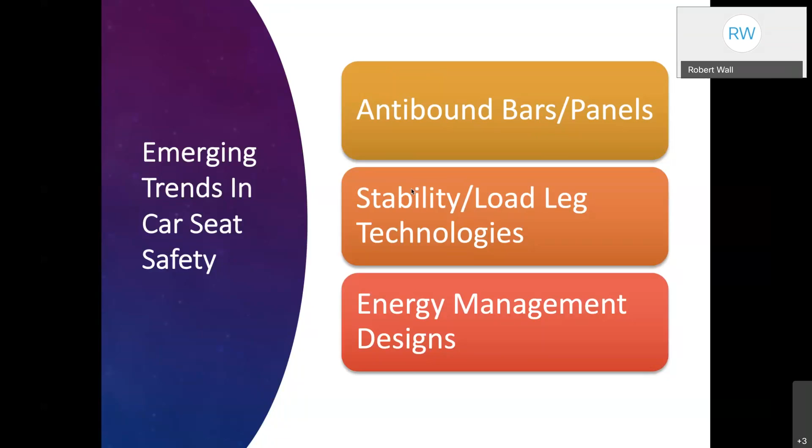Now, one thing that I will say, our 213 standard does not regulate stability or load legs or anti-rebound bars. It does not. It also doesn't regulate any other type of energy management. It does not say you have to have X, Y, and Z to make the data say this. They just give us a performance standard. How you meet that standard could be a number of things.

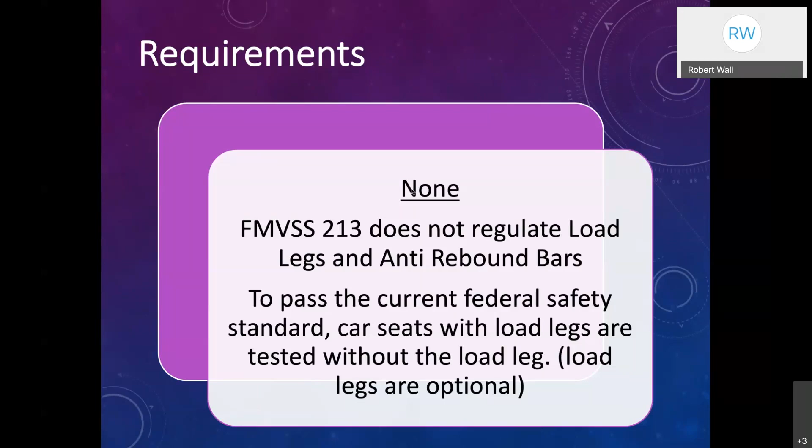Now, the biggest problem with introducing some of these things like load legs and anti-rebound bars, there is no testing procedure for those. There is no standard for those. There isn't even a floor in the 213 bench currently. So testing a stability leg or a load leg becomes problematic and also very expensive. So that's another reason why it's taken a lot of time to kind of migrate to the US. It's an extra cost that people were just not willing to put into it.

So think about it, what are the five things a child seat does? Go back to our child seat class, go back to the standardized curriculum. Keeps the child in the car. It contacts the strongest parts. It spreads the forces over a wide area of the body. Sounds like crash energy management, right?

A child seat helps the body slow down or ride down the crash forces, and it protects the vital organs: the head, brain, and spinal cord. If you saw Julie's presentation this morning, she did a great job talking about how we need to protect that head, neck, and spinal cord, and even head injuries can lead to spinal cord or neck injuries just from the impacts.

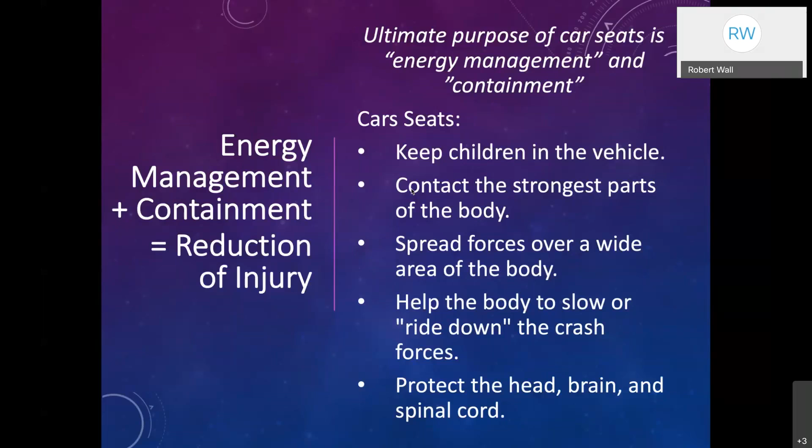So again, what does a child seat do? The first thing it does is keep them in the car. Then the rest of this is all basic energy management. But how do we manage it even better through design?

There are a lot more seats out there now that have a lot more features on them. All of these are proven trends now being introduced into the US - load legs, European belt routing where the shoulder belt goes around the back, and anti-rebound bars. They're all designed to reduce the transfer of energy to the child, resulting in less injury. In Europe, legs are standard in many places. Rebound bars are standard in Australia, Canada, and other places.

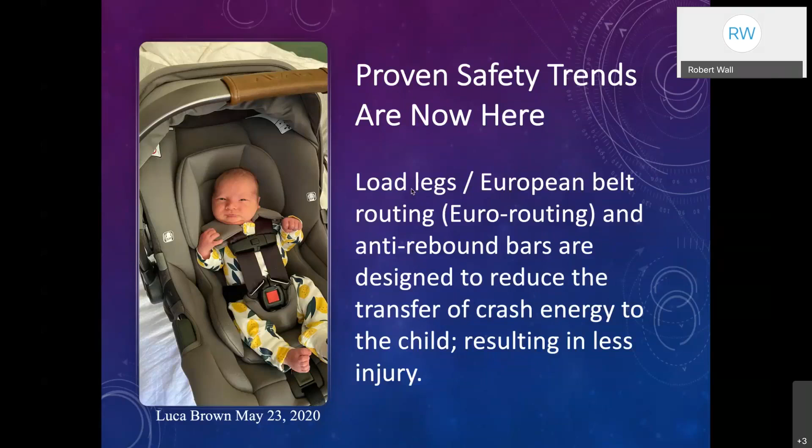Now, do they do what they're supposed to do, and what is it they're supposed to do? Let's talk about legs first. The stability leg is the big thing you're going to see on the shelves the next year or two. I almost think every child seat manufacturer, except for one or two, either has a seat with a leg or is working on one, and the reason is because people are demanding a little bit extra safety for their child.

Also, because of that demand and the design features other manufacturers have done, it's not as expensive anymore. At one point, when ISOFIX or the latch system was introduced into the United States, everybody said, well, let's just do the same one Europe has. Well, it was heavy and expensive, and it was going to cause probably less child seat use. So we had to come up with a hybrid, which we now call latch. But that hybrid didn't include a leg, which the European version does.

So do we use a leg? The question is, it's up to you, it's up to the manufacturer. Do they want to take that extra step to design it in - a lot more money, a lot more testing - and then the parent has to put up that extra money?

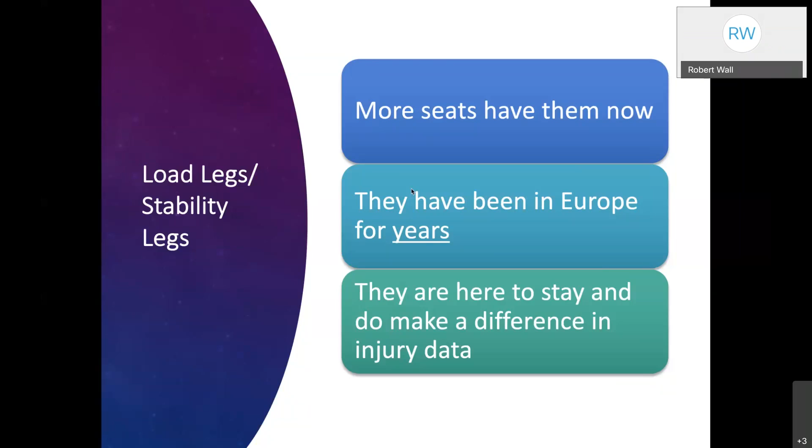But I will say this: Evenflo now has a child seat with a stability leg for under $300 - actually under $200. So it's becoming affordable. These energy management tools are doing just that - they're becoming affordable, and they make a huge, huge difference in injury data.

What the leg does is support the part of the seat or base that extends from the base to the floor, and it can provide additional stability. It absorbs the energy and stops that rotation. Now, unfortunately, as one of the very first instructors, we didn't do a great job of talking about rotation - we talked about rotation as ride down, and people really thought the rotation part was the ride down, and that is not true.

The rotation is just extra motion. There is no ride down until that rotation stops, and then the energy is transferred or ridden down through the seat - down through the seat, across the baby's back, into the plastic shell, and through the floor of the vehicle, through the leg. That's when the ride down begins.

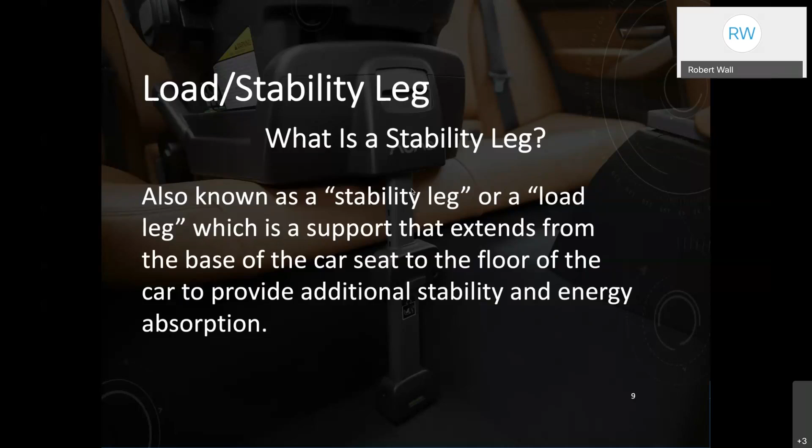So all that other stuff is just extra motion. The goal is, how do I start ride down quicker? I reduce the rotation forward, and to do that you would use a leg. The leg starts that ride down process much sooner - it limits the initial movement toward the point of impact, which reduces not only rotation and injury to the child, but also reduces rebound.

We haven't even talked about rebound things yet. What it does - because we've taken, and somebody told me this one was great - if you take the wind out of its sails going this direction, there's not as much energy going the other direction.

Julie this morning talked about a study done at Ohio State, and they didn't find a lot of data showing a significant pattern of injuries in rear end or rebound crashes because of rebound.

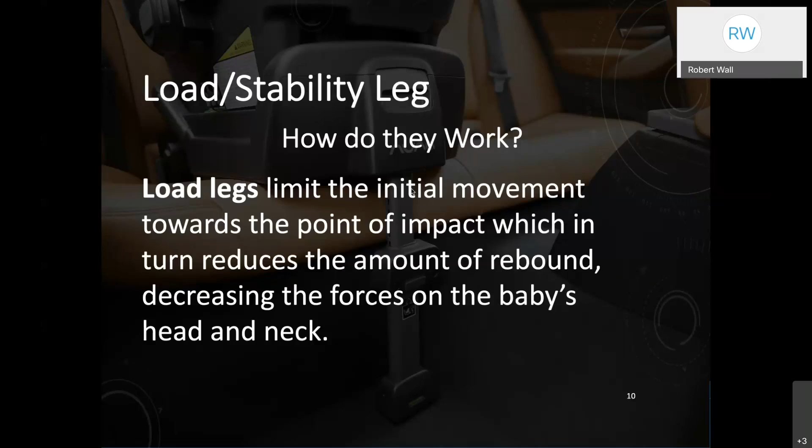Child seats are doing a good job because they're either reducing that initial energy, taking some of the energy out, or have a sturdy enough base that's up against the vehicle seat enough, or installed well enough that it doesn't rotate all the way back. So there's no striking or injuring of the head, neck or spinal cord. It decreases those forces on the baby's head.

When you think about what a leg does, it reduces the rotation, sometimes by 90% or more. If I can start or stop that rotation quicker and start the ride down quicker, that's potential for less injury to the child.

When we look at the data in a crash test, we look at HIC values, head injury criteria. In one of our tests for 213, we saw almost a 40% reduction in that number using a leg versus not using a leg. If I can reduce injury values to the child's vulnerable parts, the head and neck, by 40%, that's what I really have to think about.

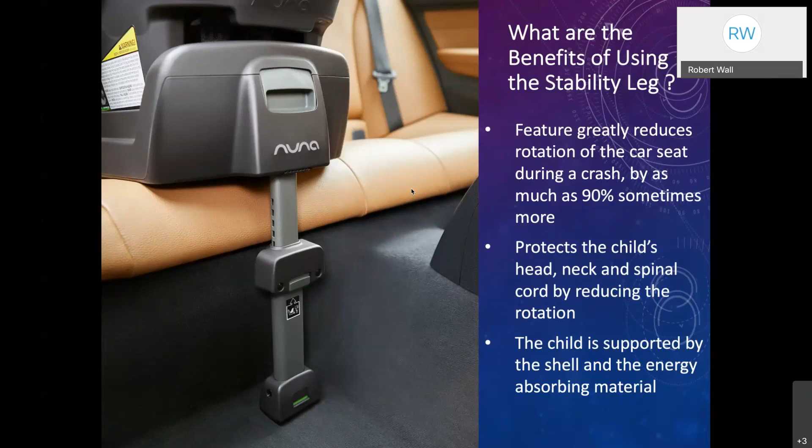Here's our standard base. It's just a leg that goes down and touches the floor, and all it has to do is stop that rotation. But it also reduces the backward rotation because we've taken the energy and distributed it.

Let's look at some crash tests. This is a standard seat, typical car seat rotation without a load leg. It starts at 40.45 degrees vertical - the yellow lines are vertical, and the second angled yellow line is the starting angle and the apex angle, the furthest point into the crash. So we start at 40.45, and at full rotation it's just a little over 63 degrees from vertical, about 23 degrees of frontal rotation.

Guys, that is a 213 pass. It's not a less-is-better test, it's pass/fail. If it goes over 70 degrees, it fails. If it's under 70 degrees, it's a pass. So this passes the test.

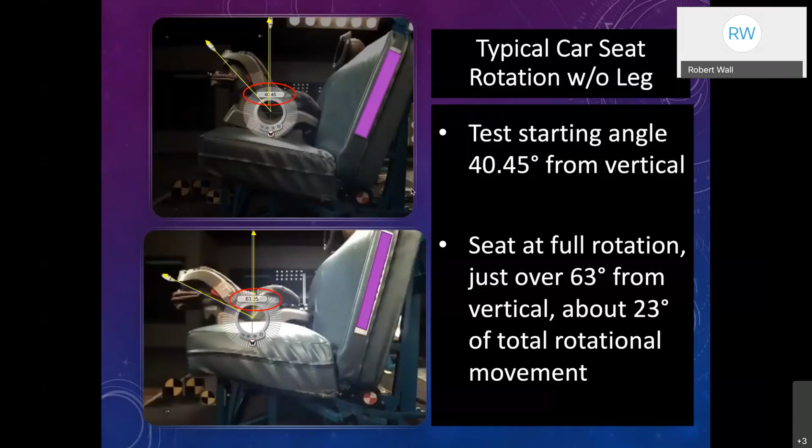Here's our original PIPA, rear facing, without a leg. Somebody asked in the last workshop, is the leg optional? Yes, it's not required in the US, it's not required to be tested. It's not tested, but we have to test it to make sure we're doing our due diligence to make sure it passes in all modes.

But we do test it with and without. This is without a leg. Our starting angle is usually about 36.12 degrees - we do it very specific. And at full rotation, we get to 54.6 degrees, so it had about 18 degrees of rotation.

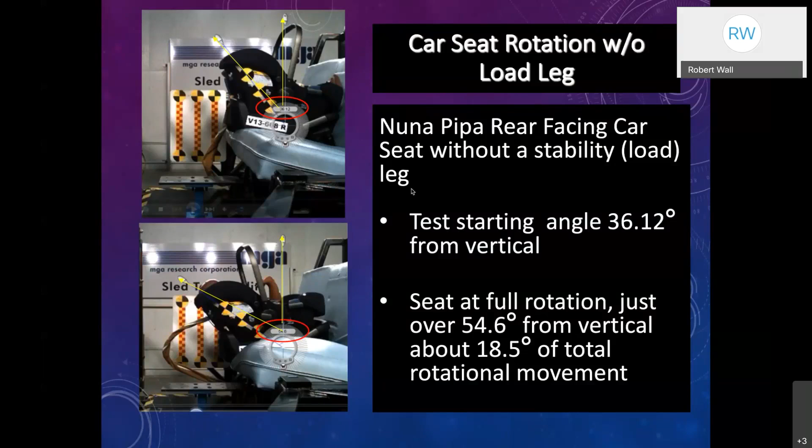You can see in the two pictures, the targets in the back, the lines and targets show how it's reclined, covering up the first and second target. If it came down another 20 degrees or so, the top of that seat would be toward that third target almost, and it would be a fail. This is a passing test.

So what does it look like with the leg? We have a test with the leg - this is a 213 test that we did, and I had to pick this one because it was a great one. It started at 36.28, and at full rotation it's still at 36.28. Guys, it didn't rotate because the leg kept it in its place.

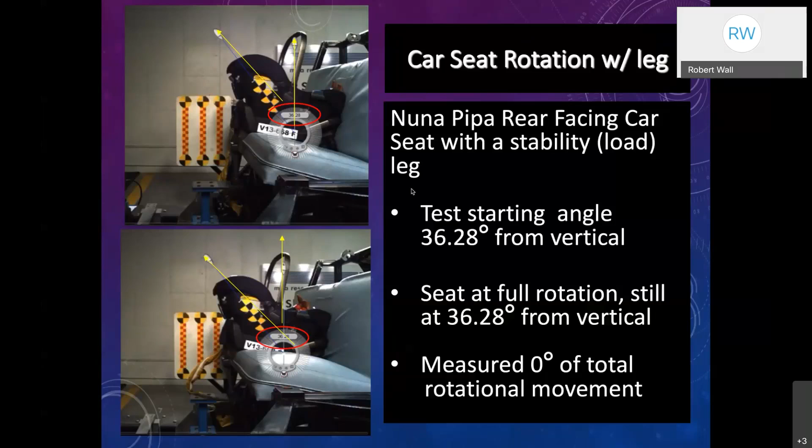Is that the norm? No, there's going to be a little rotation possibly. But this just shows you how well that leg does. You can still see there is movement because there's three targets in the back, and in the bottom picture it's just barely touching the first target. It's the same crash scenario as the other one without the leg, it just doesn't rotate. So the crashing, the energy, and the ride down started much quicker. So here's what it looks like.

Don't blink because you'll miss it, but it is in slow motion. It's going to go over again. This is a crash test in slow motion, at 30 miles an hour.

You'll notice the leg, and that blue piece on the floor has to be put in. We have to have that configured by the test facility to simulate a floor, because none of the test benches in the United States have a floor. There have been several petitions to put a floor in, but those petitions have been turned down. So this testing is the manufacturer paying for it on their own dime, extra on top of what they already do.

You'll notice it's even hard to see if this thing's moving, except for the dummy's feet. So again, very little motion, very little, if any, rotation at all.

So how does that leg equate to less rebound? We look at that test and say, here's our rotation, and here's the rebound. You'll notice in the picture above, the legs are moving, so this is mid-crash, actually on the way back. The child seat is now rebounding back toward the seat. At 66 milliseconds, the seat is rebounding at a negative 1.37 degrees.

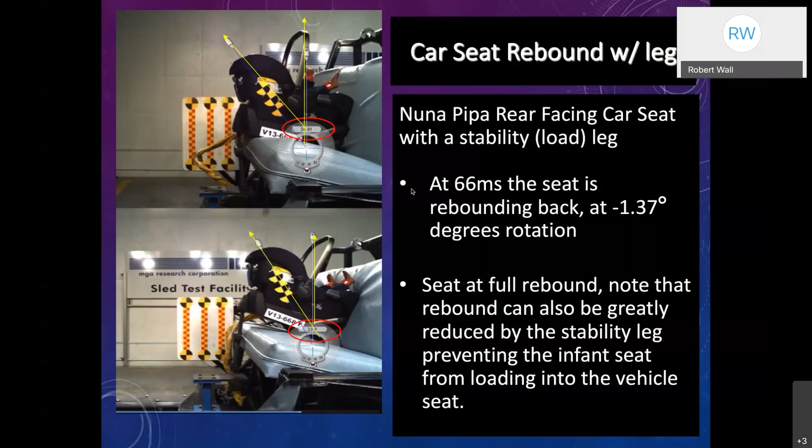And it decreases the head injury values up to 33%. I have a little note there because that's the average of all our crash testing using the 213 standard and reporting it to NHTSA. Other data shows it's closer to 40%, but that's over time, over a lot of different tests.

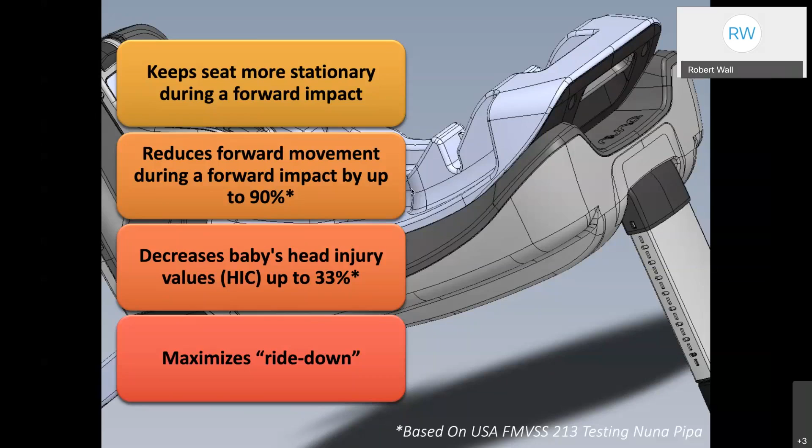And what it does is maximize ride down. That's what we have to understand, what ride down really is. Ride down is not the motion, the rebound, or the rotation going forward. It's not starting until the seat stops.

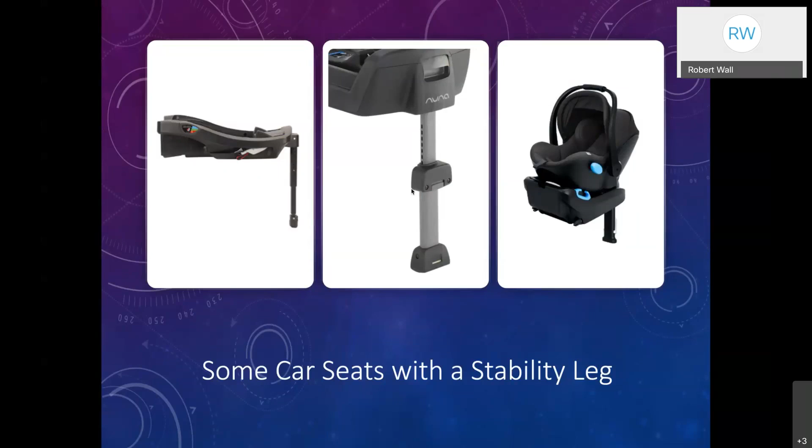So this is one of those things that's here, and you're going to have to know about it, because people are going to say, okay, what do I do with this? How do I make this work?

So when you look at, say, the Nuna, which I just presented briefly because I messed up with time, the Relax base with our stability leg is just that. It incorporates a newer stability leg that gets shorter for vehicle middles that have large humps, and makes it longer for pickup trucks.

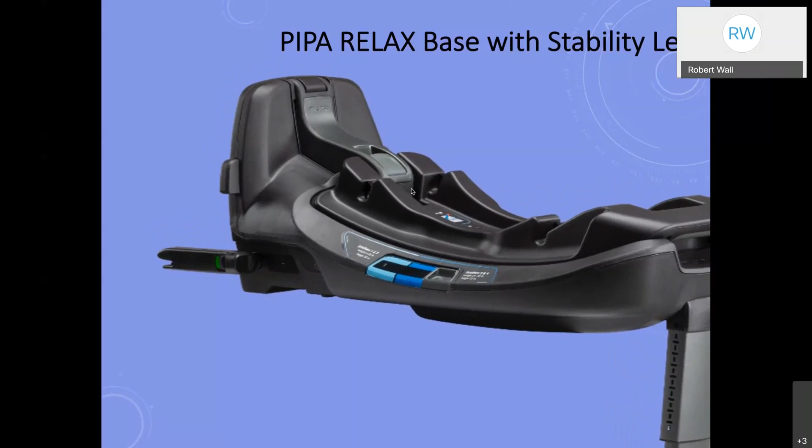It also has an adjustable rigid anchor that goes in and out, that not only swivels, but once it's attached to the car, you can push it in toward the vehicle back, and it will tighten up and snug that lock-off, which also acts as a rebound panel, into the back of the seat. The one thing this piece does is make a heck of an install, one of those rock-solid installs you really don't have to work at doing.

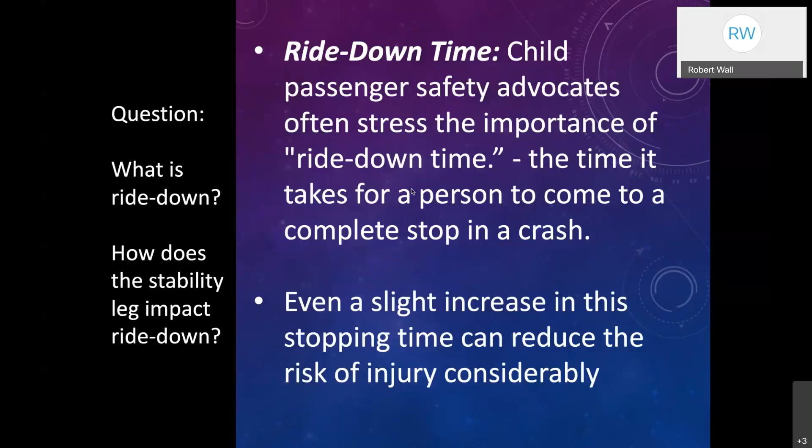So again, people misunderstand ride down a lot. They think it's the motion, and the reason it's rotating is because it's riding down. No. We need to increase ride down by stopping the seat. Increasing the stopping time can reduce the risk. In other words, stopping it from rotating, stopping it forward-facing with a tether. It's an energy management tool, a tether, that's been around forever.

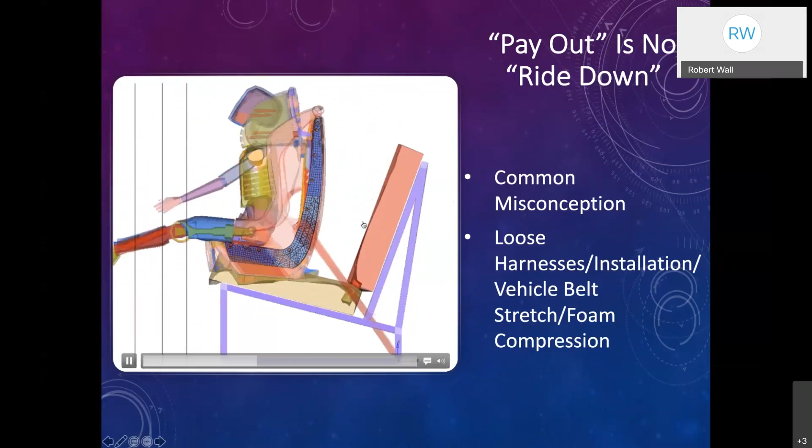And if you think about it, using this simulation, I've got it up on the screen here. If you look at this, we've got our basic vehicle bench, and you'll notice all this deformation of the lower part of the seat.

Well, that's part of payout. So as the child has a forward-facing crash, everything moves forward. The seatbelt, even though it's tight, actually stretches. If it's loose, it's even worse, because then it's loose and then it stretches. This simulates, believe it or not, and it looks loose there, but it is a tight install. But what happens is it stretches out, and that's called payout.

There's also payout in the harnesses. The harnesses will stretch out. And when the child actually hits the harness, the seat starts to stop that energy. So all of this, the seat pad, the stretch, the foam compression, all of that is called payout.

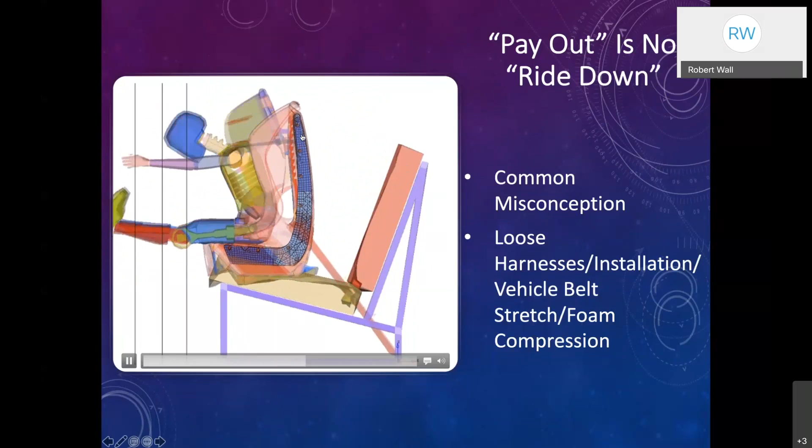Now watch real close during this next one. You'll notice the spine of the seat, when it turns red, that's where the ride down begins. That's where the seat starts to absorb some of that energy. But look how far forward it goes first, because it still has to do the payout.

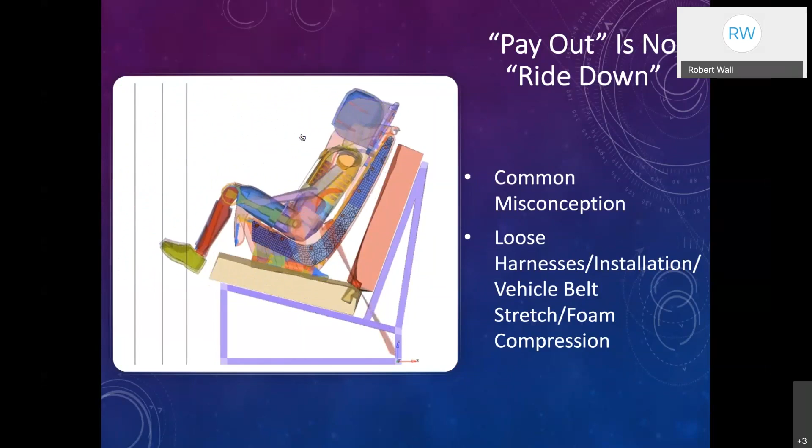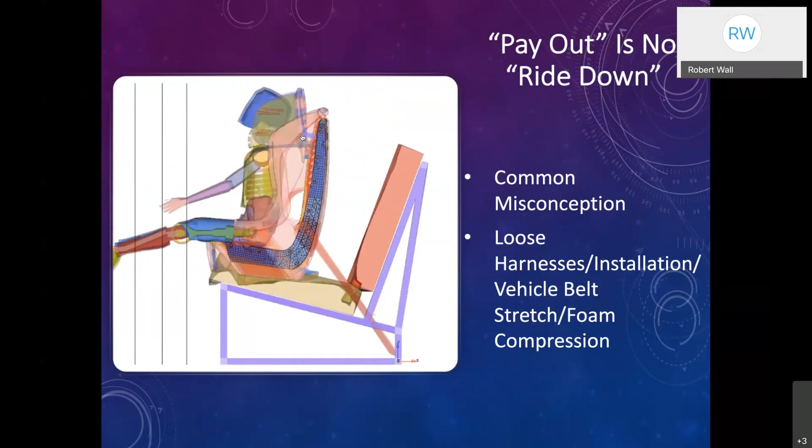And this morning Julie talked about injuries to legs and how parents all get crazy about, well, their legs are facing the back and they seem to be crunched up and they're going to hurt their legs. And she talked about, we see, even though the number's negligible, it may even be the same, there's still just as much potential for leg injury forward facing as rear facing, and maybe even a teeny bit more because their legs are exposed and they're coming forward, and all that payout, if we have too much of that forward motion, their legs are going to hit whatever's in front of it.

So again, payout or that motion is not ride down. You want the child coupled as tightly as possible to the harness system and the car seat coupled to the vehicle tightly, with the seatbelt or the lower anchors, the latch. And when you do that, you gain the benefits of ride down. If you're loose, you're not going to get that benefit.

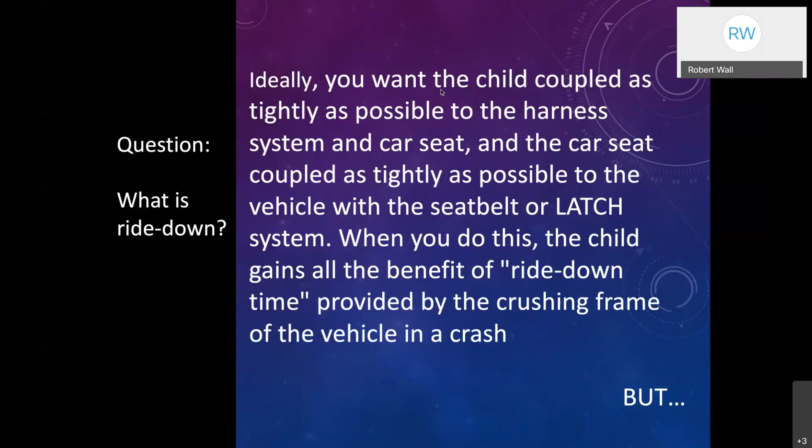Even though I say tight, I also want to caution everybody, it has to be reproducible. Remember, in a crash test lab, we have to be realistic. They only use between 13 and 15 pounds of pressure to put a seatbelt in a child's seat for a crash test. So what is tight?

Guys, it's tight, all right? Has anybody seen people do this with car seats? And I know everybody's going, yep. How many people had somebody come over their shoulder and say, hey, I can get that tighter? It's usually a policeman or a fireman, and they're saying, I can get that tighter. Guys, yes, okay, it's not an Olympic sport. We want it tight, but we also want it to be reproducible. And we don't want it to damage either the vehicle or the child seat, because then we've got nothing. We've got an expensive paperweight that's broke.

So if you think about our tolerance levels, our curbside tolerance and our testing tolerance levels, they use 13 pounds of pressure total. That's it. Nobody puts anything in the seat. Nobody. But guess what? There are many things designed to help with both installation and energy management all at the same time. It takes out some of the payout. It takes it out.

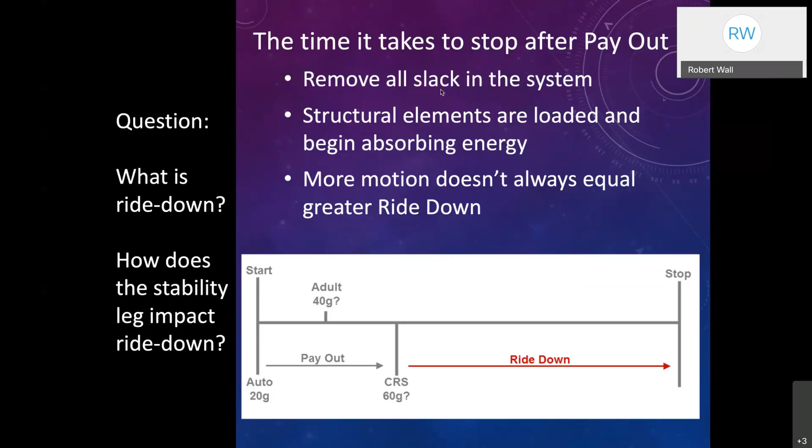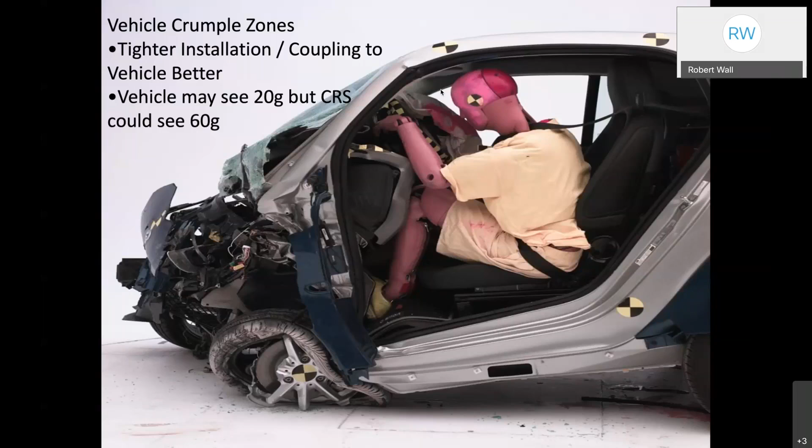We want to minimize that payout because then the ride down can start. So there are a lot of different things. Obviously we're not talking about cars today, but when it comes right down to it, the better installation to the vehicle does help the child seat with ride down, whether we like to admit it or not. That's what it's all about. The vehicles are designed with crumple zones and all kinds of energy mitigation things that we need to take advantage of. And we don't, because we have the seat that's too loose, and when the payout comes out, it's too much.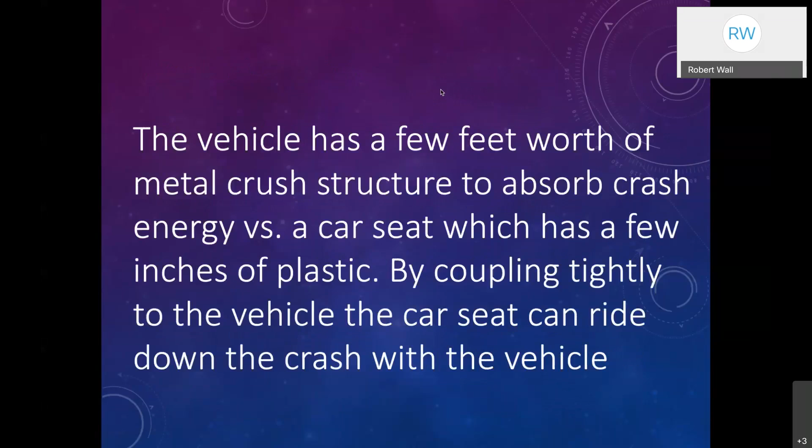Remember, the vehicle also has that ride down effect. It also has payout, which is the metal crushing. So again, we want to make sure we minimize that stuff. If we can, we have to figure out how to minimize that payout.

Well, if I do a child seat with just a seat belt, no base, I can do this without the European belt routing. But if you think about what the European belt routing does, it helps energy management without the base. It basically does the same thing as a load leg, it limits that downward rotation. It doesn't limit it as much as a steel bar to the floor, but it still limits it. So that, in itself, is a limitation or an energy management force.

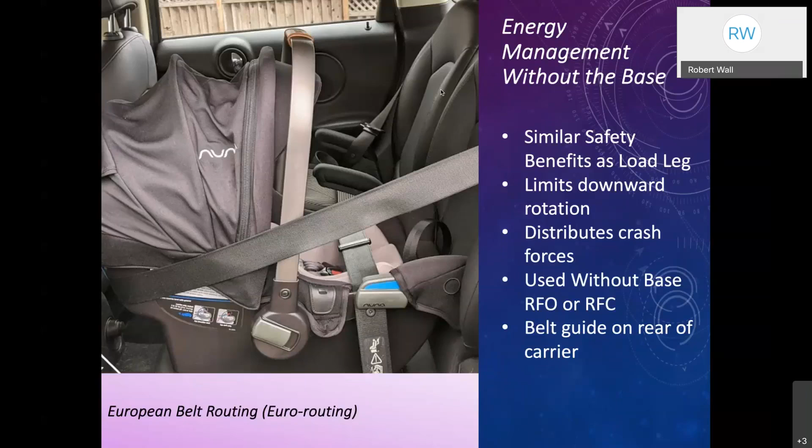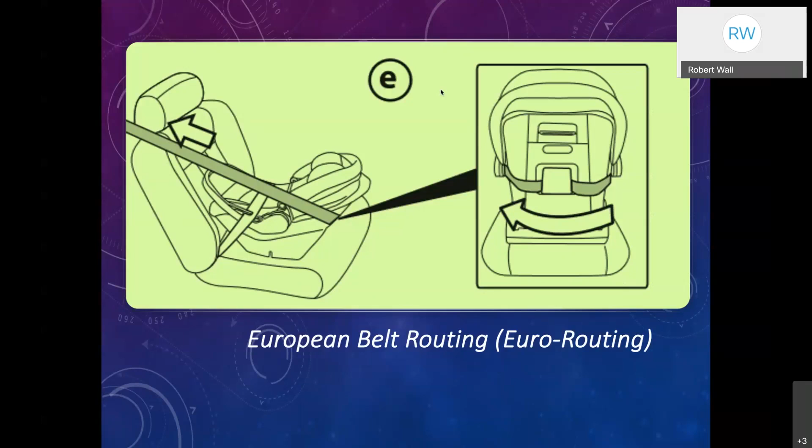Not all seats have this. Not all rear-facing infants have the European belt routing. Some of them do. This is out of an owner's manual that shows where the European belt routing works. Now, some problem is, and we've all run into it, where the seat belt's not long enough. And that is a problem with some of the American-made vehicles or American brands. But that's changing over time, just like the load leg, just like the European belt routing was never here before either, and now it is.

All right, let's talk about anti-rebound. I know, and I've seen, and I'm going to say this tongue in cheek, so don't get mad. Social media is evil, all right. And on social media, you see people every day saying anti-rebound bars are so much safer, you've got to have a car seat with an anti-rebound bar. Even in today's or this morning's presentation, Julie Mansfield said that there's not really a lot of data that says there's injury from that type of crash or from the rebound.

And rebound panels, when you start designing seats, we go back to Brian and say, well, how do you design a seat? You need to put your money where you get your best bang, in other words where you get the best protection. And that's the key, where everybody is more comfortable. Now, I will say this, an anti-rebound bar does exactly what it's supposed to do. Sits up against the back of the seat and gives the seat more stability and eliminates any type or most motion that could injure a child rebound.

Is it the cat's meow? Probably not. And a lot of people say, why doesn't the Nuna Rava have an anti-rebound bar? Because the Canadian one does. Well, the Canadian one does because it's required in Canada, even though the data doesn't necessarily point that it's necessary. So in the United States, when that was designed, it was designed to maximize other things that are really more prevalent as far as injury mitigation and energy management.

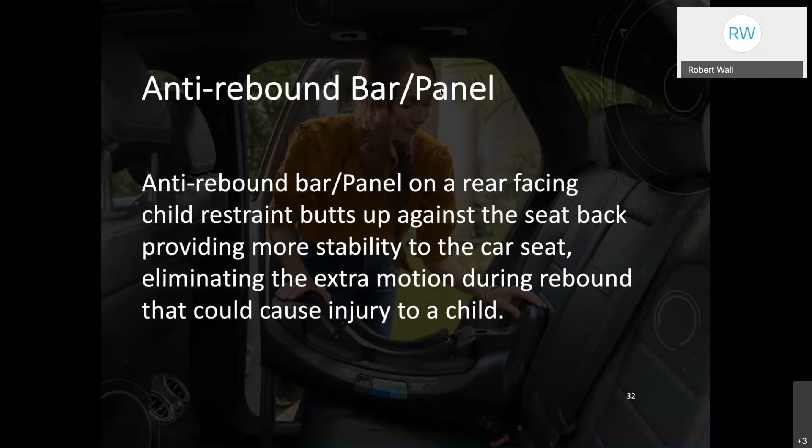We've had many crashes using the Rava where rear-ended, rollover, whatever, and the seat does flip up during that crash, and the child was protected, never touched their head, never touched anything because of the design of the seat. The only reason why it's that way in Canada is because it's required. It's also redesigned completely, so it's a different seat.

So when you look at the anti-rebound panel on that RELX base, when you offer all this energy management stuff like the leg and the rigid anchor, and now you have an anti-rebound thing, you definitely have something that manages energy in a crash. A major thing that actually manages what happens in that crash.

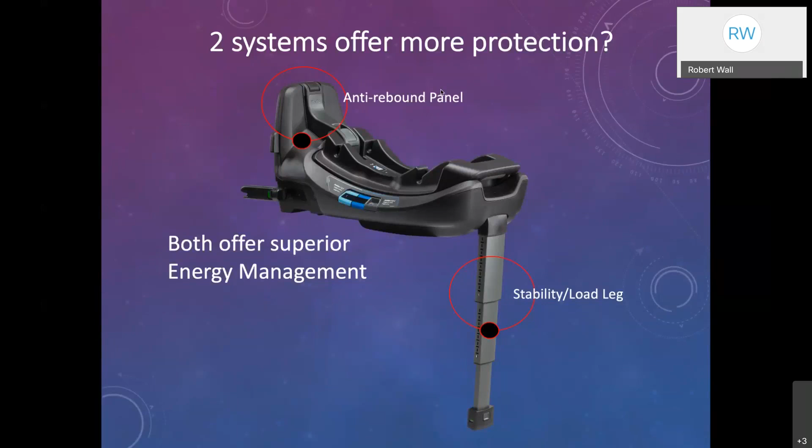But again, what it really does is give the sense of a much better install. It does definitely help with making it fit the vehicle better, makes it one with the vehicle, which is nice. So it is a good thing.

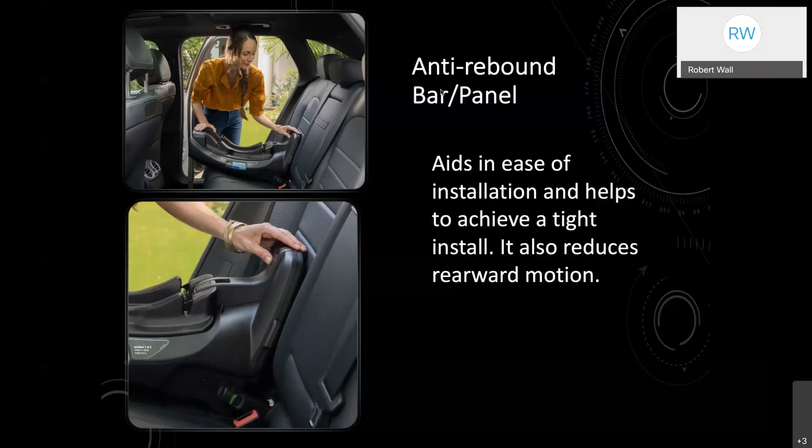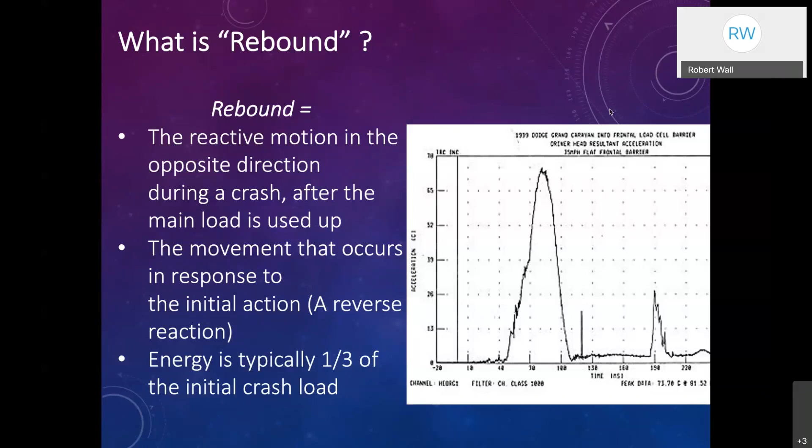When you look at rebound, and there's very little, rebound is just a reactive motion in the opposite direction. Look, this is a data point. The first hill is the original crash. The second little blip is just a blip in this computer. The third one is the actual rebound impact. Guys, look, it's about one-third of the initial impact.

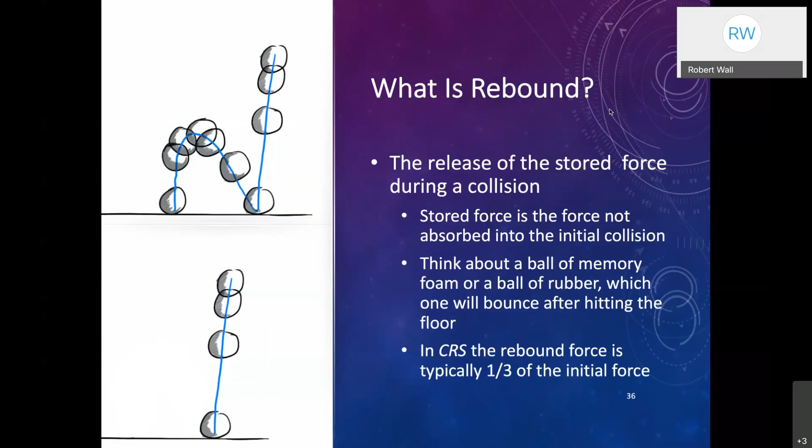So it's kind of like, hello, there we go. What's the difference between a rubber ball and a ball that is like a soft, squishy, memory foam type ball? A rubber ball, when you hit it on the ground, it stores up that energy and releases it, it bounces back up. A memory ball actually hits the ground and just goes plop because it just absorbs the energy.

A rebound bar is only one-third because there is no rebound, there's very little. So this rebound, if you jump on a diving board, it can't come back up and rebound as much as it went down to begin with, because it would hit you in the butt. So it's one-third of the crash load. So the need is maybe there, but not as much.

So again, anti-rebound bar works in rear facing car seats, which is where it's used, and it's two-thirds less. The load is two-thirds less rear rebound, and it's usually non-injury level type crashes.

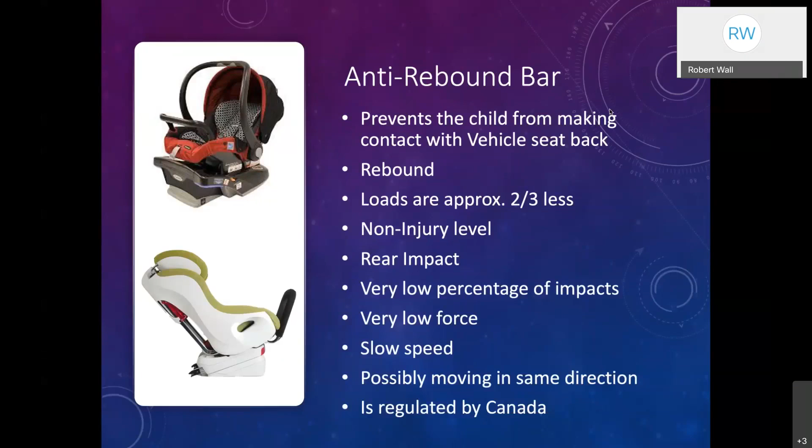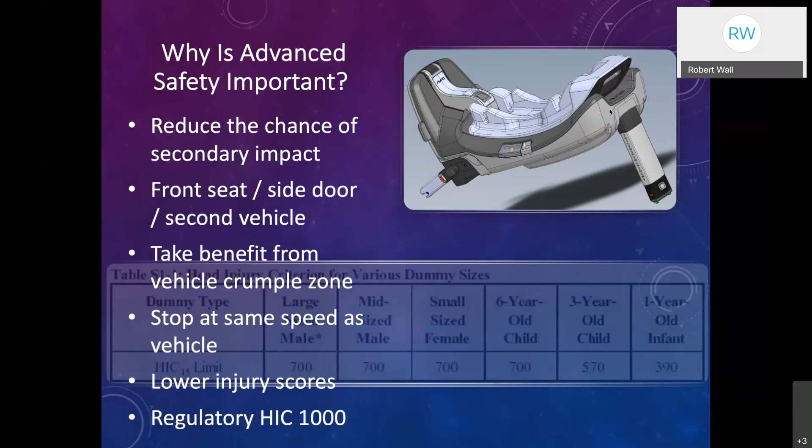So when you look at all of this, and I know it's grayed out in the back, that's our standards for the HIC values and the different things. We want to reduce the chance of impact. The HIC value, or head injury criteria, has to be under 1,000. For our infant, all the way to the right, guys, energy management, look, we're at 390. That's a good number. They're going to sell that seat.

But remember, there's a lot of different energy management things. There are honeycomb pieces. I don't know if anybody saw, and I hope they did, Tony's little presentation about his car seats. They had that little foam piece underneath the lap belt portion of the webbing of their car seat, and he says it's not packing, it's energy management. Energy management comes in a lot of different forms. The foam is energy management. The honeycomb pieces made out of plastic that are on the Britax, those are energy management features.

These big features are what I've talked about. Bottom line, every seat made has some type of energy management feature, and they all meet a certain standard, and they're all safe. The problem is we still got to get them into those seats. Almost 40% of the children killed or injured are not in anything. And we try, perfection is great, but we got to get them in it first.